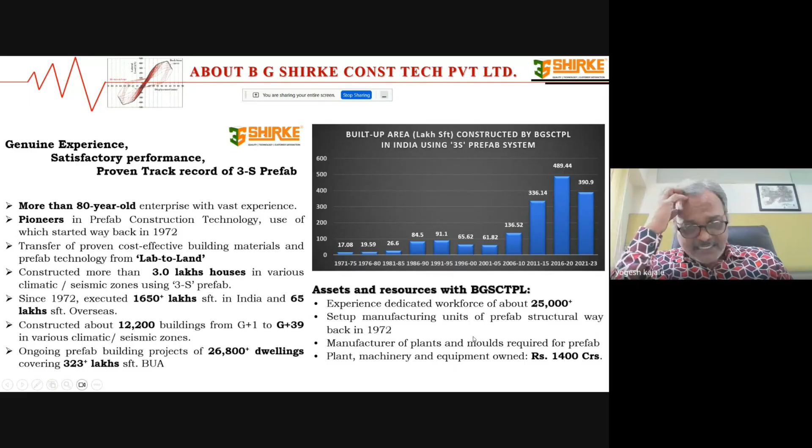Every year, we build almost about 200 lakh square feet. We have a dedicated workforce of 25,000 people working with us. The manufacturing units were set up in 1972, and the cost of plant, equipment, and machinery owned by the organization is more than 1,400 crores—that's the capital investment.

What exactly is the system? Here is a 5-6 minute video which will emphasize how the construction happens and what exactly the precast system is. I'll start the video.

Is the voice of the video audible? No, sir, voice is not audible.

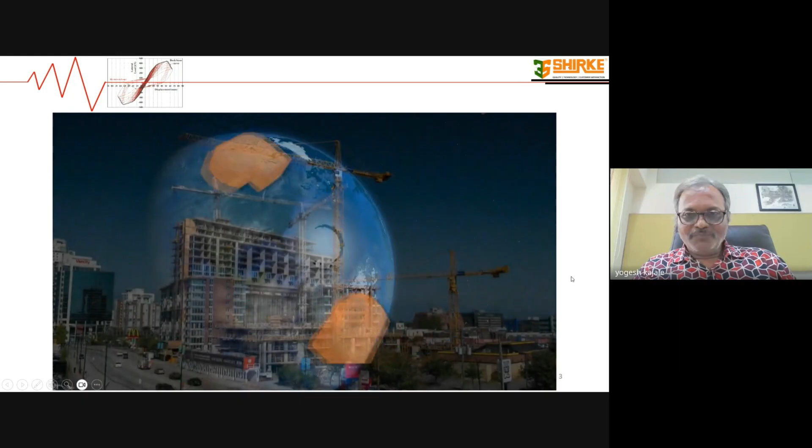So this was the video.

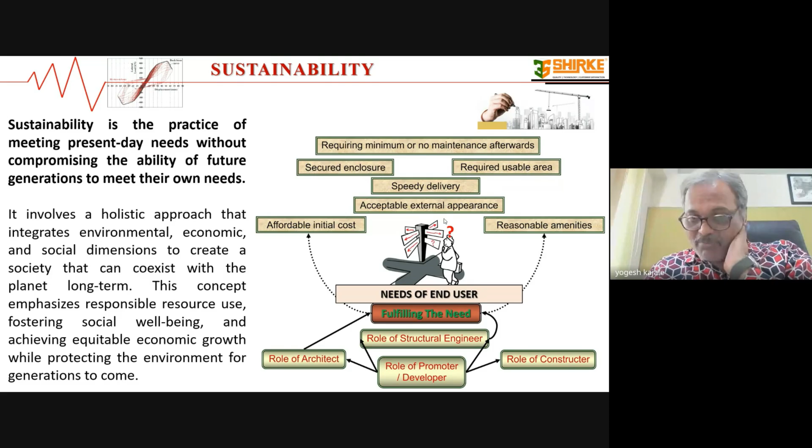Now these are basic needs of the end user, and who fulfills this need? The role is of promoter developer, could be a private developer or a government body, then architect who does the architectural planning, then the structural engineer who ensures the stability and creates the structure which can withstand the service life of that building, and the contractor, rather the constructor. So these are the four key elements who ensure that the end user's needs are catered with sustainability and affordability.

Now, as per Merriam-Webster, sustainable is basically defined as relating to or being a method of harvesting or using a resource so that the resource is not depleted or permanently damaged. That means we should be able to recycle whatever is being used in the construction after expiry of the service life of that particular structure. It could be 50 years, could be 70 years, depending on the type of the structure.

How can a civil engineer ensure sustainability in housing? In my opinion, every civil engineer should ask three basic simple questions: what, why, and when. What exactly is required? The obvious answer is strength and durability. Why? Because of safety and sustainability. And when? Within the shortest possible time.

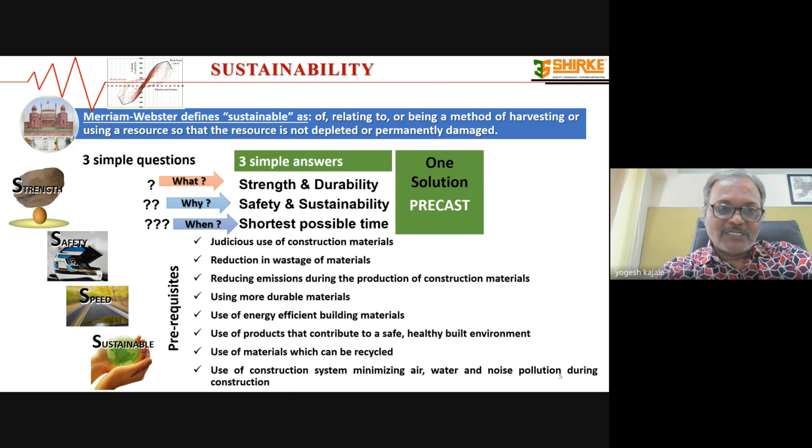With this background, if we look at the heritage of India, precast is not a very new construction technique being discussed or adopted today. If we look at the Taj Mahal, or the temples or forts, we will see that all these structures were precast. What exactly was the precast? It's not made in concrete, but made in stone. Precast basically means manufacturing the element away from the construction site and then transporting those elements to the construction site.

Then assemble and joint effectively so that the structure can be erected within the minimal possible time, and the structure can sustain all the intended loading conditions as well as climatic conditions and disasters, in case they happen - like storm, wind, or earthquake. So these monumental structures are basically our heritage structures, which are precast, not in concrete but in stone.

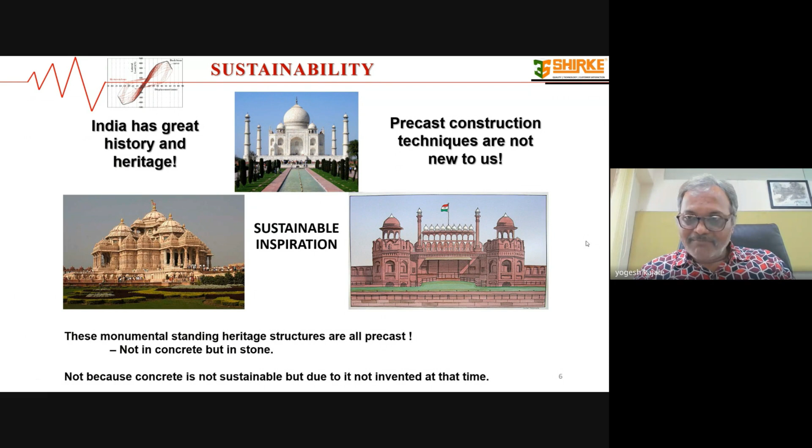Not because concrete is not sustainable, but because it was not invented at that time. Had concrete been invented during those days, our ancients must have also used the same concrete to produce these kinds of structures. So precast technique is that way not new, nothing different for us.

Now, when we talk about precast, the first question on sustainability is basically that the structure, whatever is created, must give full service life during the life of that structure. How will it be ensured? Unless and until we assess the performance of this system, no one can guarantee that the precast construction system will sustain the intended loads.

With this basic prerequisite, it is essential that any new innovative system must be tested on full scale. What exactly is full scale? Full scale doesn't mean that if we are going to build a 20-story building, then the entire 20-story building is to be tested. Full scale basically means it should accommodate all the types of joints which typically go into building construction, and a minimum 3-level structure is to be subjected to simulated earthquake loading. That exactly is what full scale testing is.

We have various Indian standards. However, these standards do not provide the full scale testing requirement of a building structure. Adopting new technologies without adequate theoretical and experimental validation can certainly result in disaster similar to that which happened with school buildings during the 2001 Bhuj earthquake.

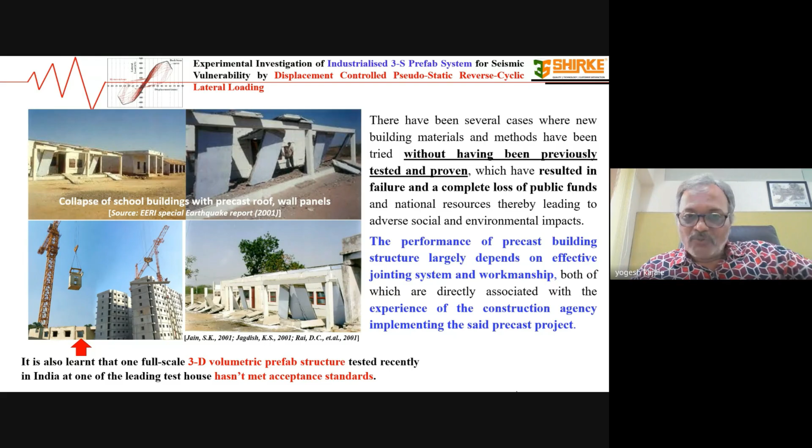We have these two glaring examples of how precast structures have failed in India. With this background, we decided that we must provide a solution to our nation, perfectly suited to our seismic conditions. The full scale testing program was undertaken by our organization long back, in 1984, when we started testing with whatever facilities were available at that time.

Now, why is full scale testing essential? The claim about safety, stability, and resilience of any building construction technology has merit only when it is subjected to intended loading on a full scale, rather than simply relying on assertions. With the growing demand for construction of tall structures, it is extremely important to ensure that every component, with its connection, that goes into the building structure is tested thoroughly to ensure the system performs to the desired specification.

The inherent difficulty in replacing a damaged or underperforming product once it is installed in a high-rise building is quite obvious, as it involves a lot of expenditure. Sometimes it is virtually impossible to carry out repairs due to non-availability of access, and the residents will have to live with the problem for the rest of their lifetime in that building.

So full-scale testing ensures the correctness of four parameters: design, detailing, production, and installation. After thorough testing, all these parameters are established and assured. It's as simple as that.

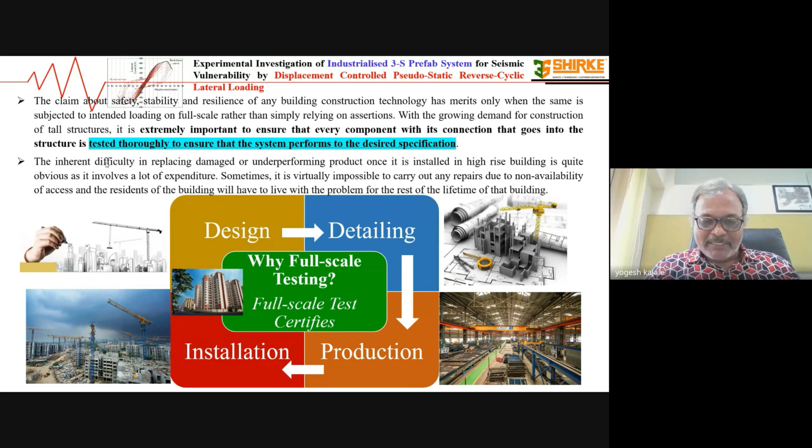Whenever a student gets admission into college and attends regularly, he is not declared pass unless he faces the examination and the test, and only then is the student declared pass. So merely relying on presumptions or assumptions of design, no construction system can be considered one that will perform to the design parameters. That's the reason why full scale testing is very essential.

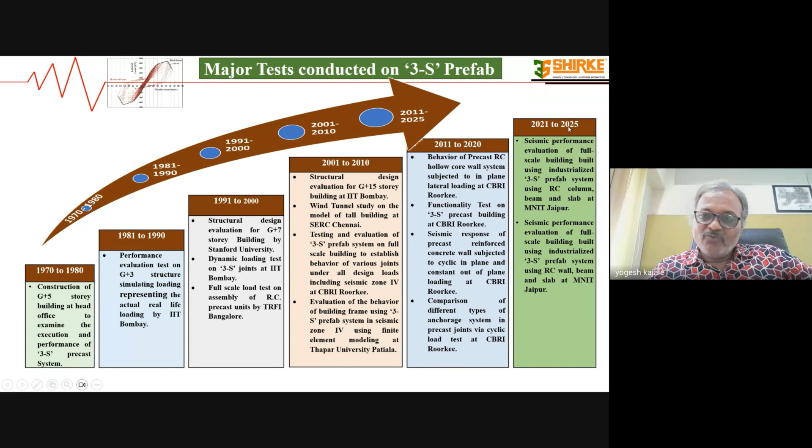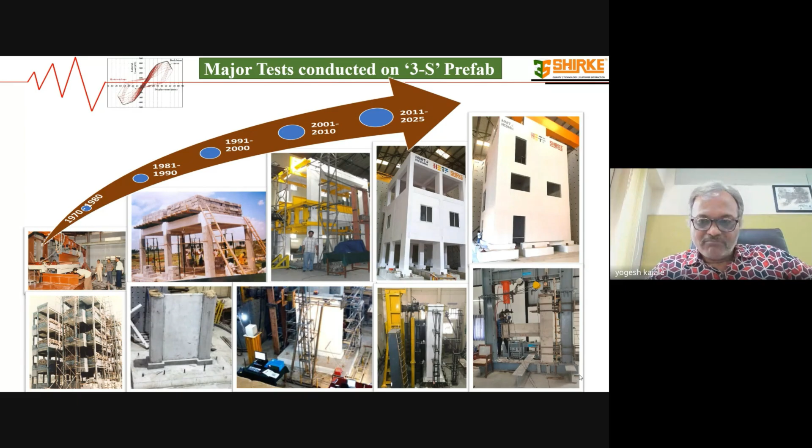When we started in the 1970s, we conducted various tests on 3S prefab with whatever facilities were available during those years. It started in the 1970s, and in 2025 full-scale testing was also completed. These are a few photographs of how the testing happened on a sub-assemblage level, on a component level, as well as on a full-scale level over the last 5 decades.

Now I'm going to share with you how the full-scale testing has happened on precast construction to ensure that the system is sustainable. The first test was conducted on a representative full-scale building, which was stilt plus 24 story. The critical floors were extracted from that particular building, and that two-level structure on the left side was subjected to reverse cyclic push-pull loading through an actuator.

The middle one is again a column beam slab system. The bottom story is a soft story, no wall panels, no walling. The top story is again a soft story, and the middle story was considered as the investigation story. This represents the real-size building of stilt plus 22 story.

On the right-hand side, this is precast RCC load bearing wall panels and slab. This real-size building is stilt plus podium plus 30, that is a 32-story building, and this particular structure is a four-room structure of that 32-story building. These three structures were subjected to pseudostatic reverse cyclic loading. The left one was at Roorkee, and the middle one as well as the right one was at MNIT Jaipur.

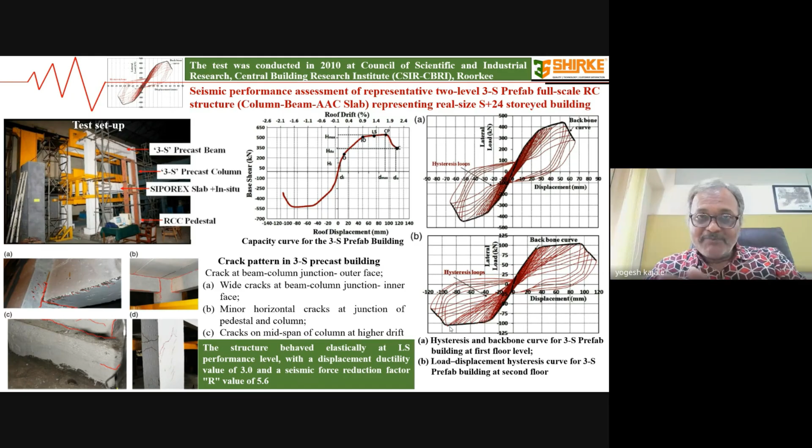After testing, the hysteresis was plotted, the ductility was ascertained, and it matched with the provisions of IS 1893. The cracking pattern was also studied, how the cracking happens, and then the backbone curve was analyzed. This was the first test, which was conducted in 2010.

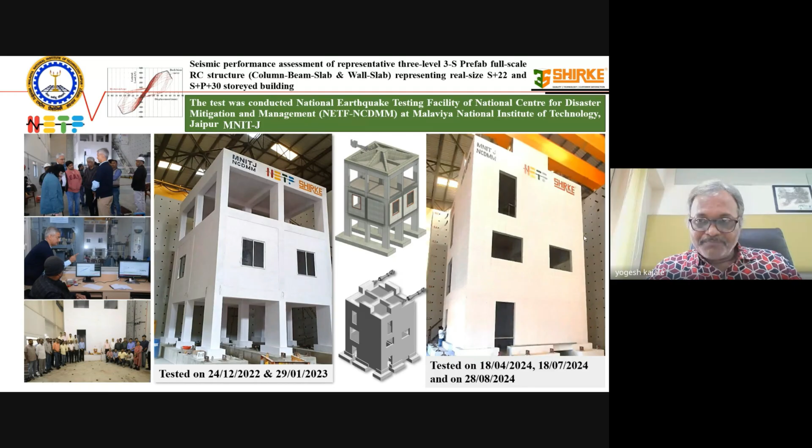Then for the second test, on the column beam slab structure, two tests were conducted in both the orthogonal directions, and on the wall panel structure, three tests were conducted. These were conducted at MNIT Jaipur. This is a short video of the first test.

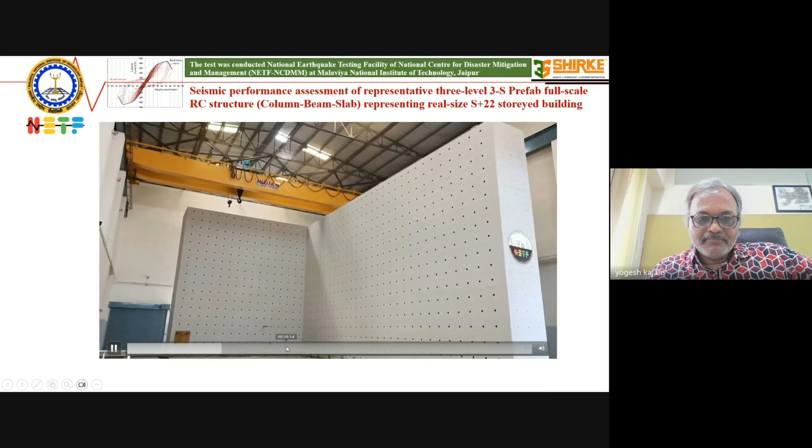This is a time-scale video. You can see how the building is getting deflected. In total this test was going on for 20 hours, and we deflected this building to the tune of 120 millimeters.

So for the first two tests on the column beam structure, the loading was going on for a total of 20 hours. The loading was a cyclic loading with the actuator installed at the top of the structure. Cyclic loading is basically a displacement-controlled loading. So from 0 to 1 millimeter, 1 millimeter to 0, 0 to -1, -1 to 0. Such cycles comprise one cycle.

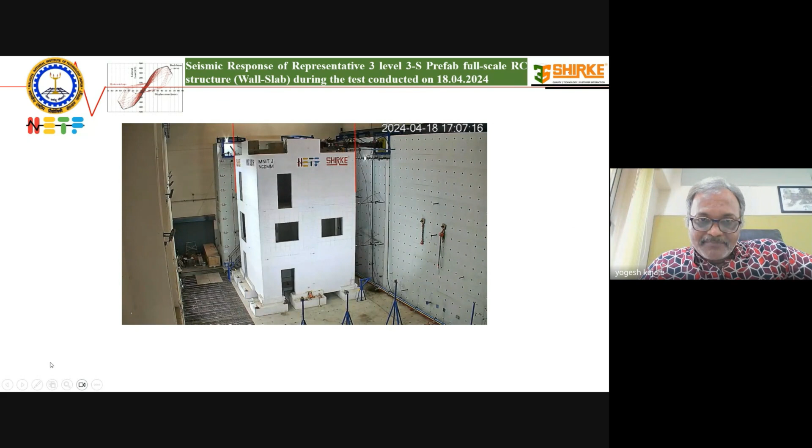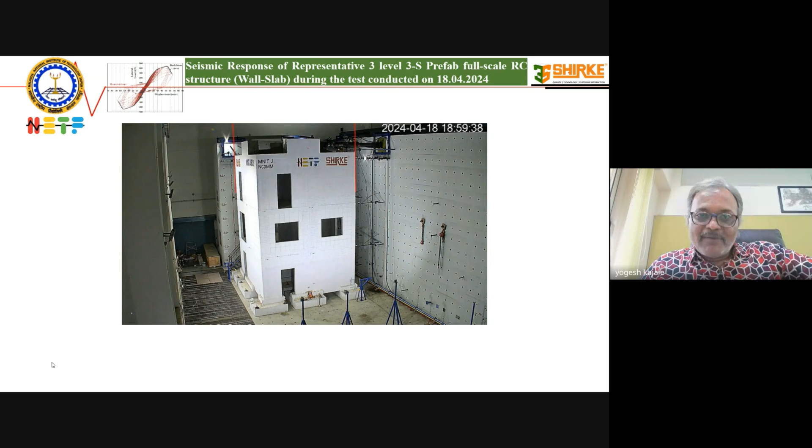After completing those two tests, we also conducted the test on the precast wall panel and slab. This video shows that test. Here you will find that the displacement is hardly anything, because with the reinforced cement concrete walls, the stiffness of the structure is tremendous, and it resisted a lot of load with less displacement. For this structure, two actuators were installed at the top, each of 100 metric ton capacity. So the structure was loaded to 200 metric tons.

After completing that, we cut the same building. This was a 4-room building. The building was cut vertically so that the stiffness was reduced to half. Then, after the first earthquake shock, the building was subjected to another earthquake event. On the left side, you will see how the building is getting deflected.

Here you will find that the displacement compared to the first video is a bit larger, because the stiffness is reduced and the capacity of the actuator is the same, 200 tons. Here you will find that no major cracking, rather hardly any cracking, has happened.

So the building is actually physically deflected. This is a reinforced cement concrete building. So after completing that loading on that part, then the singular part, which is a leftover part, that was also subjected. On the right side, you will find that. I'll play that video.

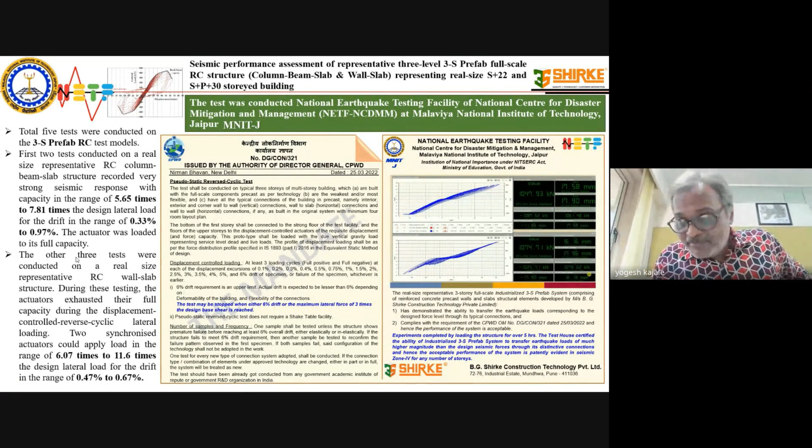In seismic design, it is very important to know how the structure will fail. The structure should not fail suddenly, but it must deflect so that there is adequate time to evacuate the people or the occupants, and the structure should be in a repairable manner after completing that earthquake event.

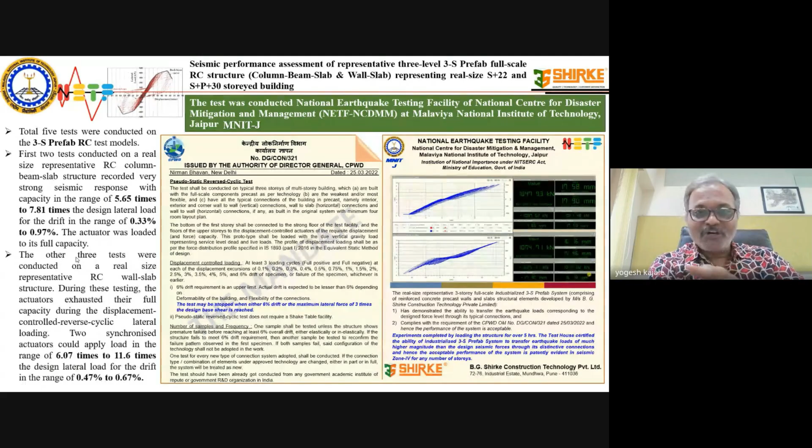So the building, we tried to increase the drift to understand how the building is going to collapse or how the joints will collapse. But we found that even after increasing the drift to the tune of 0.97%, while the permitted drift is 0.4%, still no joint was opened and the building could sustain the loading.

So our major takeaway from these experimental investigations is that the role of independent performance testing labs has gained importance in the last few years to do the simulation of worst loading conditions as per the design criteria, and putting the truly representative full scale specimen of a real size building through a series of tried and trusted procedures to validate the theoretical assumptions used during design.

Once a representative full scale specimen is tested to the specific and specified conditions and certified, the design, detailing, quality of production, and installation methods can be safely assumed to deliver the value it is expected to provide. So that's the major takeaway of this experimental investigation.

I must say that our prefab system, that is the 3S prefab system, is the first precast technology to have been tested in India on a full-scale real-size building specimen to prove its acceptance as laid down in Indian standards as well as CPWD guidelines. A similar testing protocol shall be employed for other system technologies which do not have formal standards for their analysis, design, and detailing.

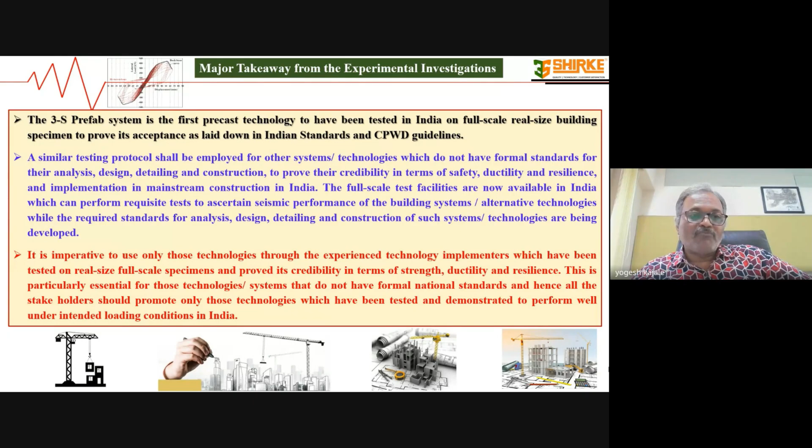This is particularly essential for those technologies or systems that do not have formal national standards, and hence all the stakeholders should promote only such technologies which have been tested and demonstrated to perform well under intended loading conditions in India.

Apart from those tests, how is the sustainability ensured? See, sustainability is basically that whatever natural resources we are consuming in construction, their use must be optimal, and we should not require to carry out repairs and maintenance every now and then. So the critical factor is basically stability. That stability can be addressed through performance testing, full scale testing, the structural stability.

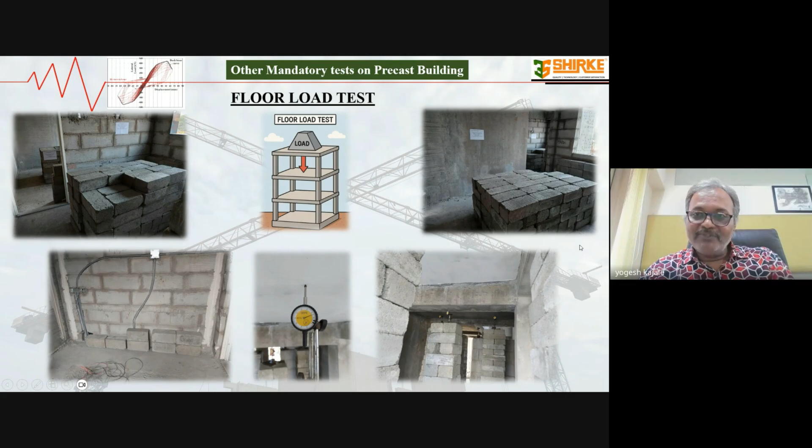Apart from that, there is another important parameter, that is, after constructing the building, there must be some additional tests which will ensure that the construction is also happening as per the acceptance standards and provisions. So floor load tests are also required to be conducted, and we do conduct such tests on representative floors selected randomly. The provisions are there in IS 456 on how to conduct the floor load test and what is the acceptance criteria. So floor load tests are conducted. The loading is given with the help of concrete blocks or sandbags.

Apart from floor load tests, the wet areas, particularly the balconies, the bathrooms, toilets, are subjected to a water pond test, and whether any seepages or leakages are happening, that is also ensured.

Now, I'll just show you where exactly this system has been used. These are basically the case studies. This project is a mass housing project at Taloja, which we built in three phases. The first phase was of 15,000 houses in buildings of G plus 14 stories. The second phase was about 8,500 houses, again G plus 14, and a few buildings were G plus 22 stories.

And the third phase comprises 24,000 houses in buildings of stilt plus 26, 27 stories. So these are the actual photographs of the construction site. You will find that there is hardly any prop or shuttering material required at site. The construction sites are relatively neater and cleaner as compared with conventional construction. So this precast construction technique is more sustainable and more adaptable to these sustainability aspects.

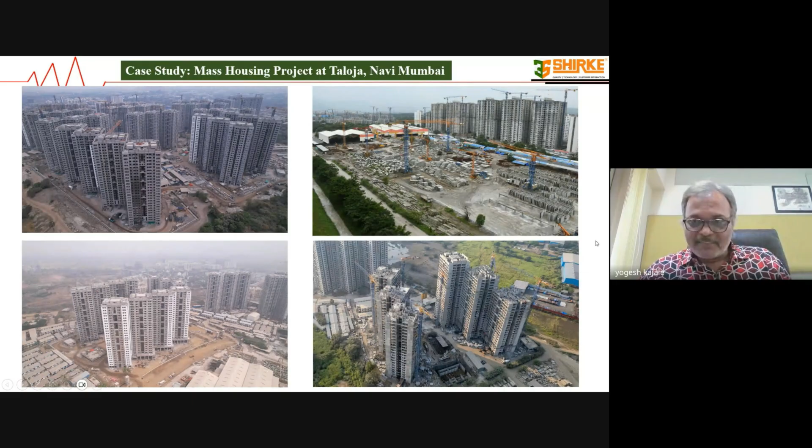Even the retaining walls and the water tanks are also constructed using precast wall panels. So minimal shuttering material is required. The embodied energy that goes into construction is thus restricted to the bare minimum possible. Again, the minimum number of labourers is required. So the resources required for construction are at the bare minimum possible in the precast system.

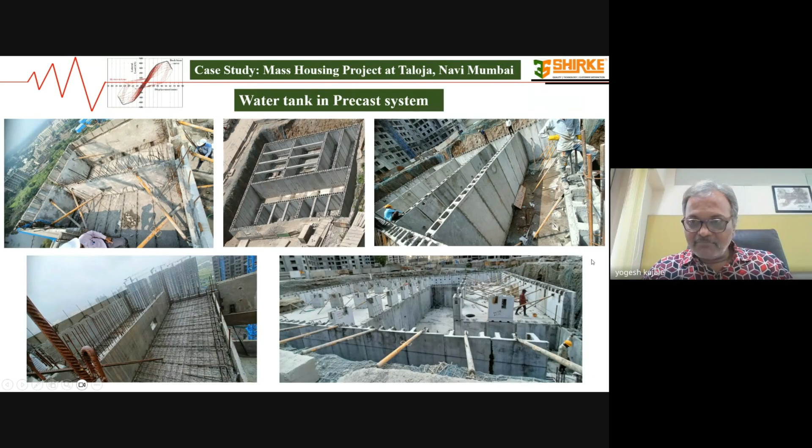And what is the outcome of this? See, the first project case study reveals that the delivery, the completion of flats, is 9 flats per day. Between when the project started and when it was finished, how many flats were constructed? We constructed 14,839 flats in 1,625 working days. So the delivery is 9 flats per day.

No other system can give this delivery of 9 flats a day. In the conventional system, it's absolutely not possible. So the precast construction system ensures faster delivery at minimal cost and with minimal resources.

In the second phase, which was completed, there were 305 buildings, a total of 5,441 floors, and the houses were 37,996, almost 38,000 houses. These houses were constructed in 2,614 days. So the delivery is 15 flats per day. What exactly has this project ensured? The speed, the strength, the safety, as well as sustainability.

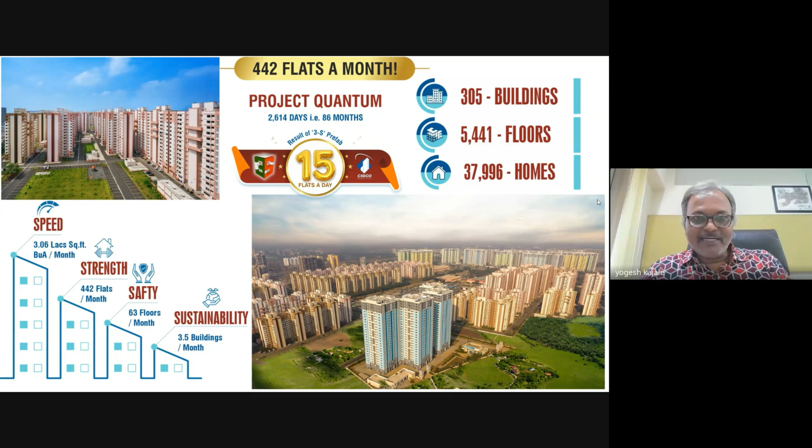All four parameters can be achieved if we deploy such systems which are tried, tested, and proven on each of their credentials. So in the first case study, you find that the delivery was 9 flats per day. In the second case study, it was 15 flats per day.

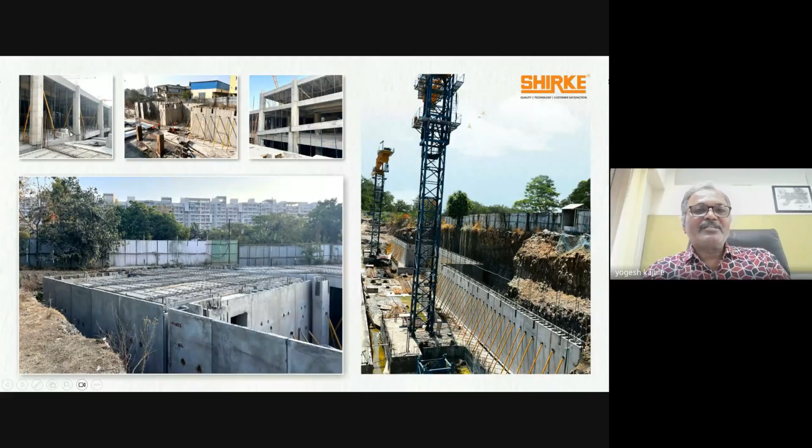These are a few snapshots of ongoing projects where even the basement is being built using precast wall panels. On the bottom left photo, this is basement construction happening. On the right side, the basement retaining walls, and on the top left side, the podium level construction with precast columns and beams. These are the snapshots of that project.

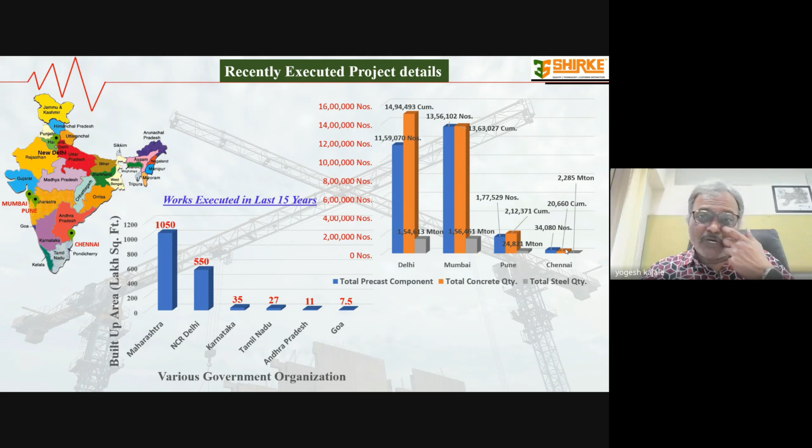This project is under construction at Tathawade, Pune. This is a commercial building where the column grids are 8.5 meters by 8 meters. It's a commercial building with heavy loading, so the column sizes are a little bit larger. So a lot of works have been constructed with the precast construction system in various parts of India. Apart from us, there are many other players who are also using precast systems.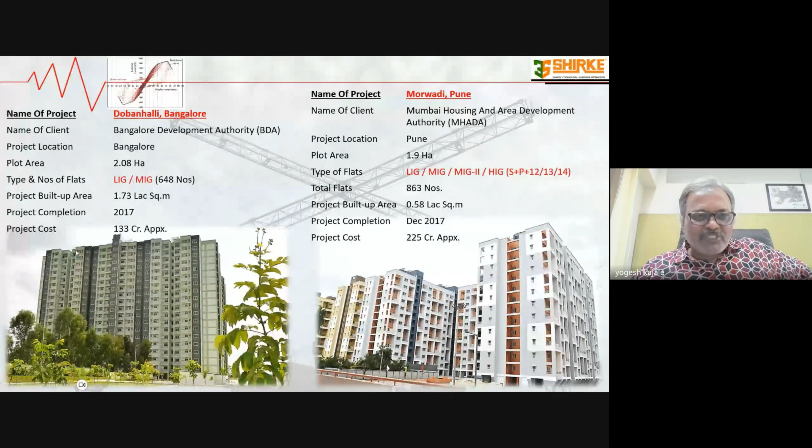There were 648 dwelling units only, and 1.73 lakh square meters was the built-up area. The right side is at Morwadi, Pune, with 863 dwelling units. So any aesthetic or architectural features can be integrated in the precast engineering and precast planning, and the components can be manufactured accordingly. So there are practically no limitations per se. The project cost could be 133 crore or even 2,400 crore.

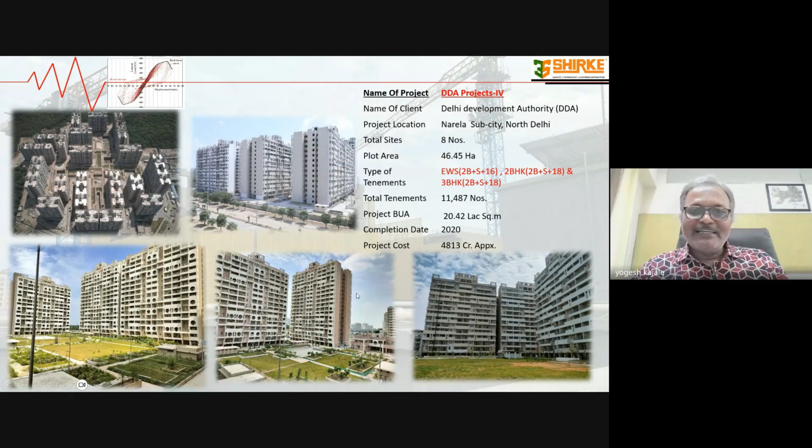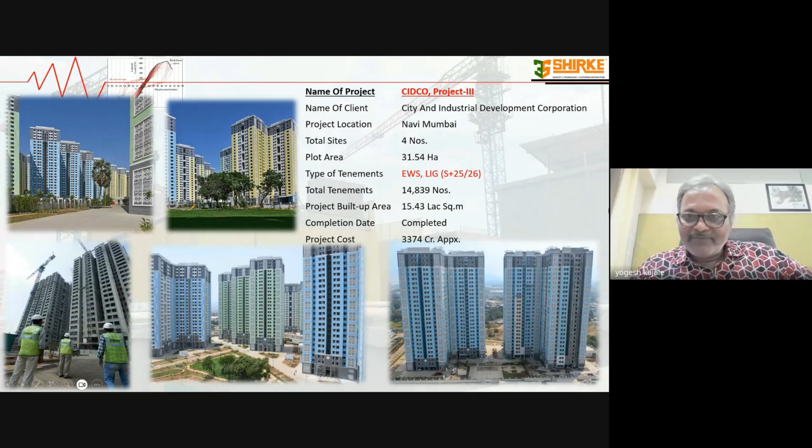This is another project at Taloja, Navi Mumbai. This is of EWS and LIG houses. The cost of the project was 3,374 crores and the dwelling units were 14,800. The buildings were stilt plus 25 and 26 stories.

This is the highest high-rise building which has been constructed in India using precast. This is one of the top 6 buildings all over the world in precast reinforced cement concrete construction. This building is at Pahadi Goregaon. The height of this building is 119 meter, almost 120 meter, and the building is of 35 plus 3 podium and 1 stilt. So total 39 story. This 39-story building was also completed using precast components, and prior to construction of this building, the full-scale test was conducted.

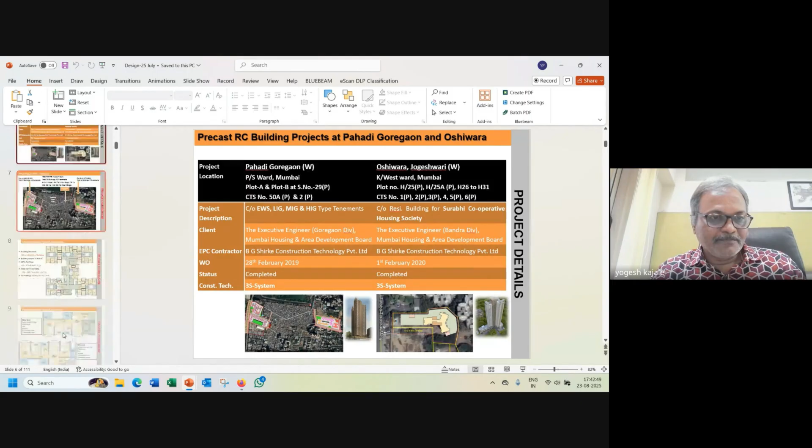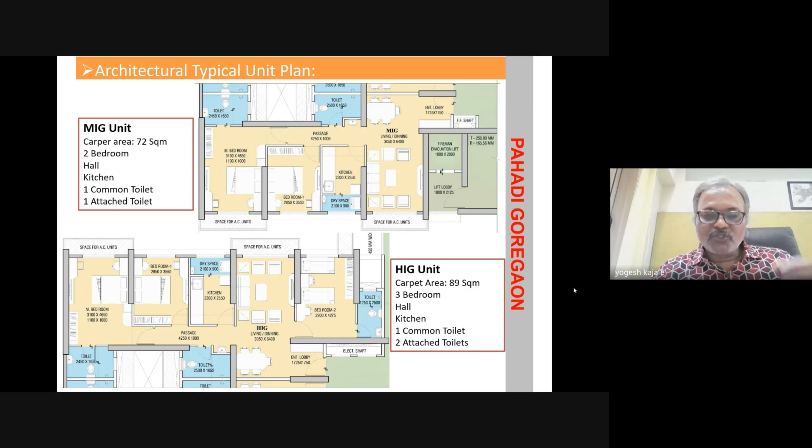See, initially the planning is done: where to locate the shear walls or columns, how many components are to be identified, how many components are required for that particular construction depending on the crane capacity. So the first exercise is basically planning of the members. And I'll come to your specific question. Okay, sir.

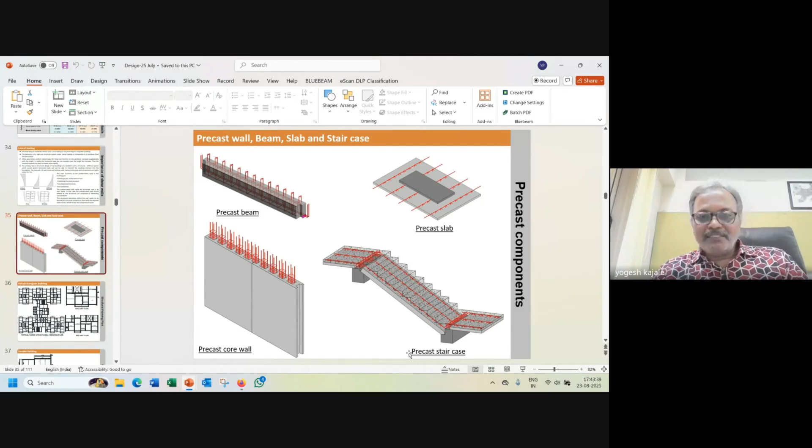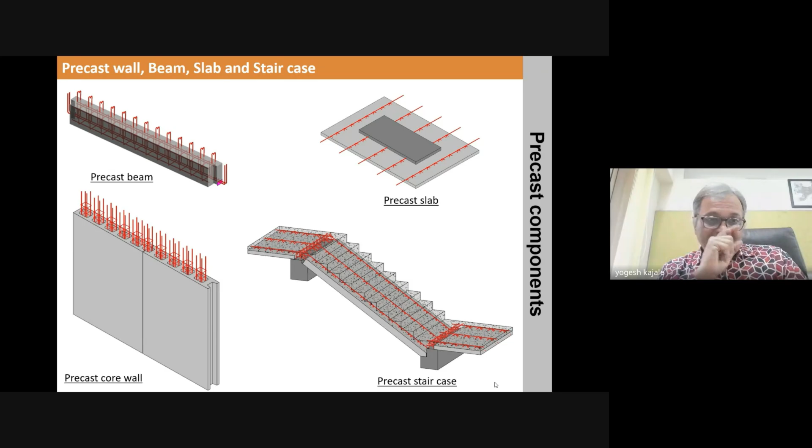See, in seismic resistant design, it is very important that the precast system, whatever will be used, must be an emulative jointing system. What is an emulative jointing system? Emulative is basically that which emulates cast in situ construction. The critical parameter is that to get the integrity, ductility and robustness, it is very essential that the reinforcement of one element gets anchored into the adjoining elements through in situ jointing. The system shouldn't have a dry jointing method.

So, for high rise construction, we have come up with peculiar shear walls. On the left side, the bottom photo shows that the walls, when they are precast, have a hollow inside, and these walls get erected at site, and then in the hollow part the reinforcement is placed and this portion gets concreted. Also the beams are partial precast; the reinforcement from the beam ends gets anchored inside the column or these cores. For the staircases, the reinforcement is projecting above, and that gets anchored inside the beam or adjoining slab. And the slabs are also half slabs. I'll come to the joint detail. Yes, sir.

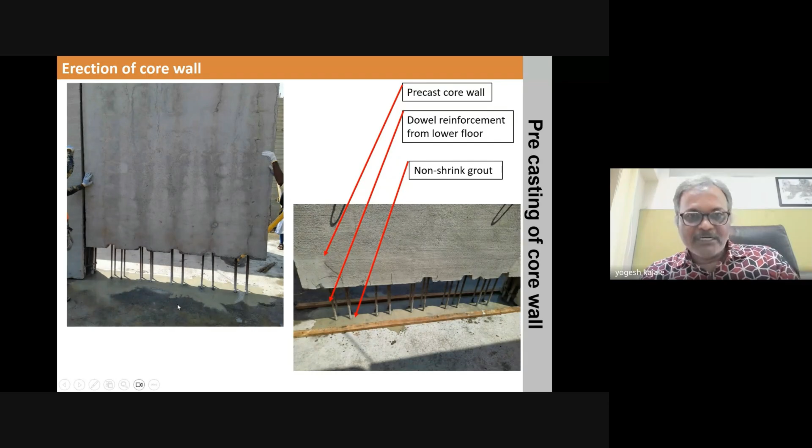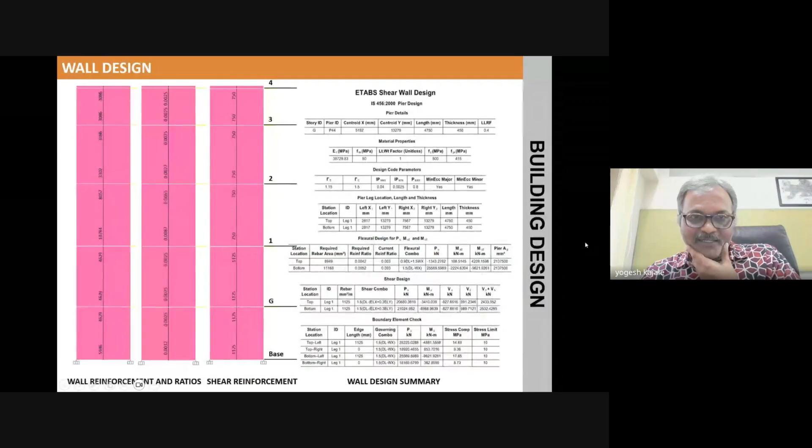This shows the lower story walls; the reinforcement is projecting above from the core, and this precast wall is erected. There are hollow cores. This reinforcement gets anchored inside the core, and after erection, the core gets concreted. One second, I'll come to that.

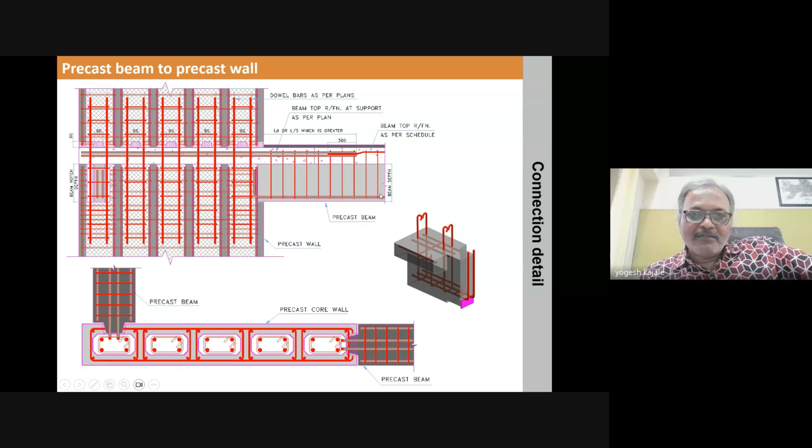So this is the schematic drawing of how the elements get connected. The bottom part is a plan wherein the shear wall is shown, and the darker side is basically a beam. The reinforcement is projecting out and gets anchored inside the core. On the left side also there is a beam; the reinforcement gets anchored inside the core. If we take a vertical section, this is the reinforcement arrangement at the beam-wall or beam-column joint. Okay, sir.

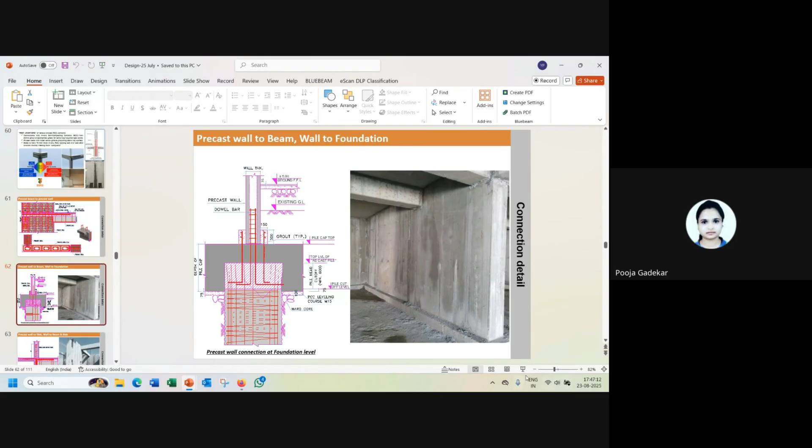Then at the foundation level, the reinforcement gets projected above. This is a pile. Basically, for this building, there was a pile foundation. So after completing the pile, the pile cap is cast. From the pile cap, the dowels are kept. On these dowels, the upper wall, the stem wall, gets erected. And then the hollow portion gets concreted after erection.

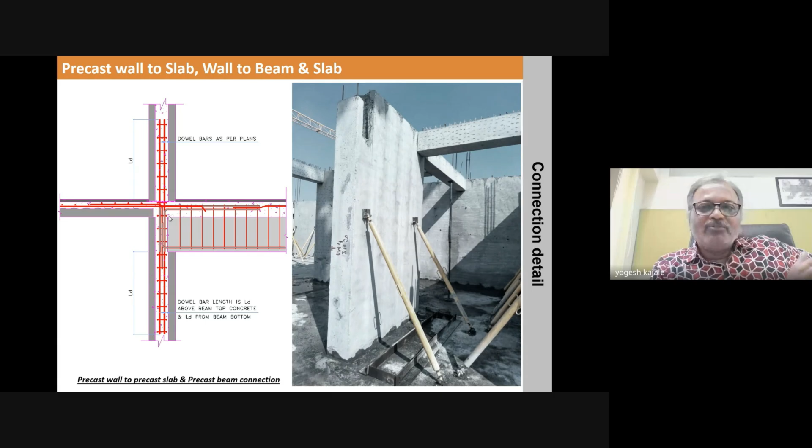Is that clear now? Yes, sir. Sir, one more question I had.

Can we use sandwich panels or ferrocement or any other such type of thing for precast construction? Yeah, we can use the sandwich panel. Rather, the sandwich panels can be used as non-structural panels, because a sandwich panel necessarily has one concrete panel, another concrete panel, and in between the two there is an insulation layer. So these two concrete leaves do not have interconnections.

If two leaves do not have interconnections, that performs very poorly, particularly in case of lateral shaking, may it be under wind, may it be under seismic. So such panels can be used as non-structural panels, non-load bearing elements. Okay.

Okay, sir. Thank you, sir. Thank you. Any other participants have any question? I think there are no questions. Sir, in online, actually, very few people ask questions. Yes, that's the reason why. Hello, sorry, sir. Yes.